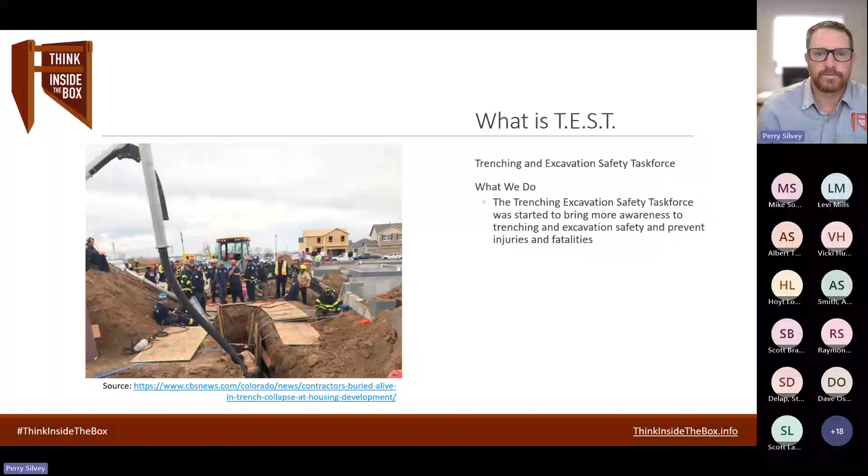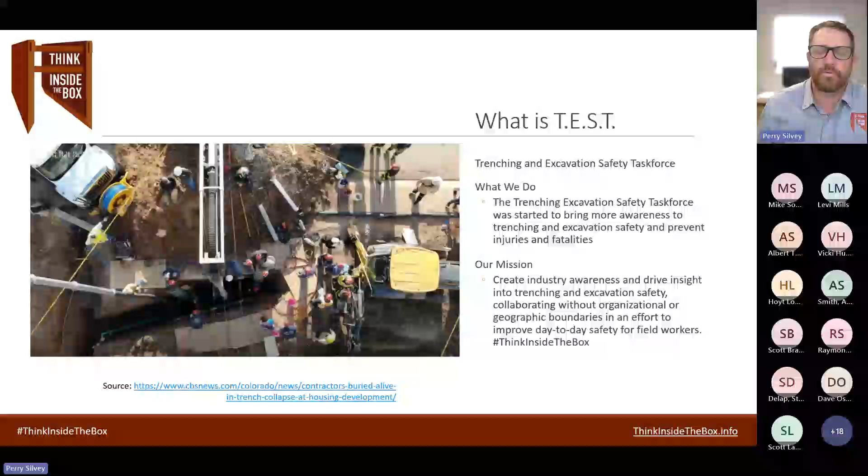And we have a mission. We came up with this shortly after we started our task force in 2019: to create industry awareness and drive insight into trenching and excavation safety. We want to collaborate without organizational or geographic boundaries in an effort to improve day-to-day safety for field workers. Since the beginning of our task force, we have the hashtag Think Inside the Box, which is our concept that we'll get into and explain.

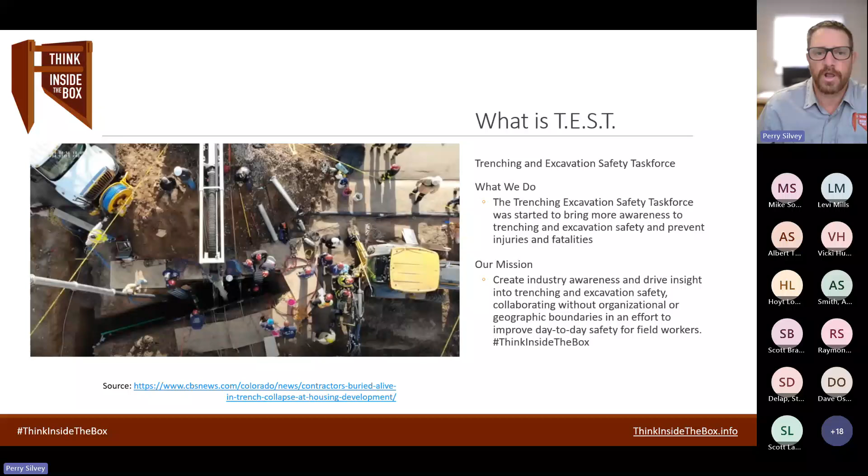You'll notice a picture on the screen there, and that's a picture of a trench collapse that occurred in 2019. This was actually taken by the firefighters' drone to show what this site looked like from above while they were trying to rescue people buried in this trench.

So why was it started? It was exactly from that event that occurred in Windsor, Colorado, Tuesday, April 16th, 2019. There was a trench collapse where two individuals, 26-year-old Cristopher Ramirez out of Boulder, Colorado, and 41-year-old Jorge Valadez out of Denver, were both buried in a 15-foot deep trench. The story that really got us passionate about this subject is that these two workers were buried in the 15-foot deep trench, and there was a trench box on site that they chose not to use.

Then the firefighters got on scene. They were able to quickly get a PVC pipe down to one of them, and he was able to communicate with the firefighters for a couple hours after the collapse occurred. The firefighters got in touch with that individual's significant other and he was able to speak with her before he passed away.

Unfortunately, they weren't able to communicate with the other victim. He had passed away fairly quickly after the collapse. But the part of this story that really hits us deep is the fact that they were able to communicate with him, and he was able to communicate with his wife before he passed away. Shortly after this event, about a month or two later, she had their baby, and that baby had to live life without his father. So that story really hit deep for us, and we wanted to try to do something.

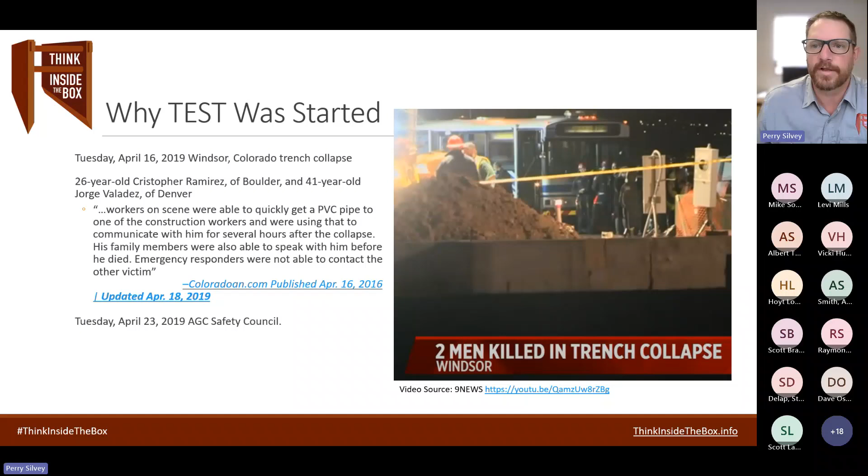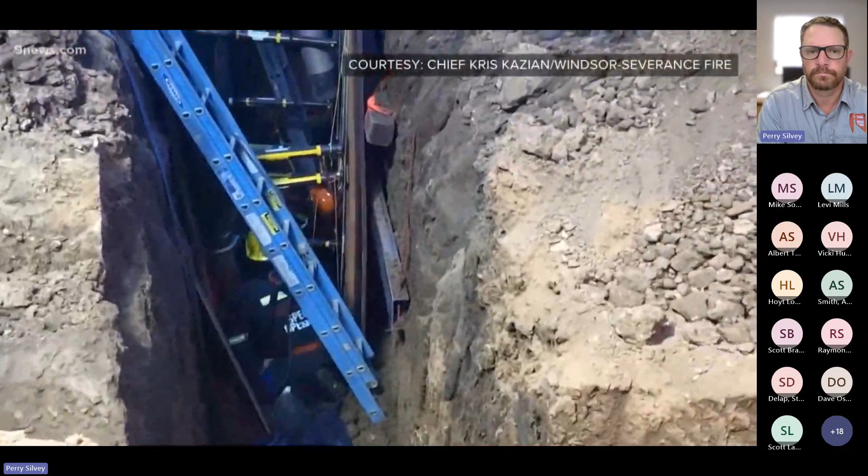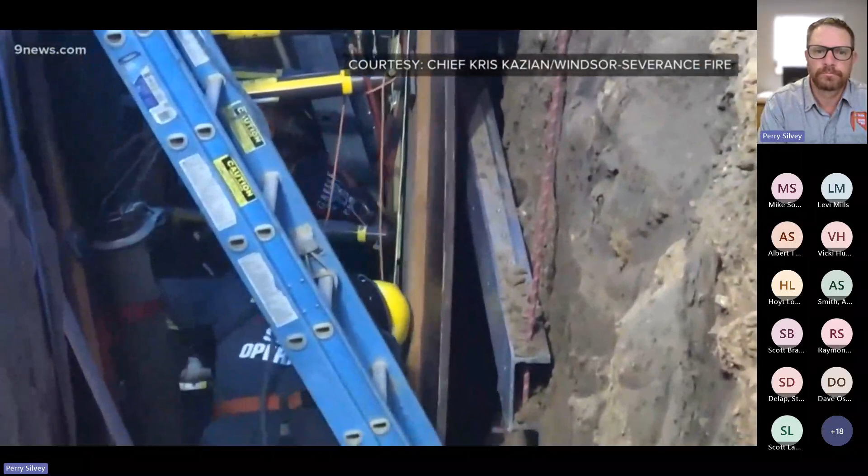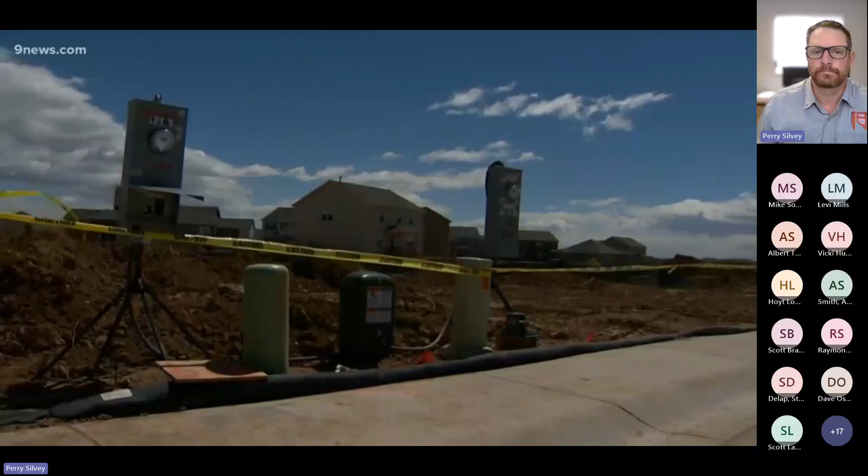This was a once-in-a-career type incident. The call that cleared the garage on Tuesday. It was empty. Sent everyone, including Chief Kris Kazian, to a home construction site on Camberley Drive. It was a long day. All that dirt is all dirt that caved in. Two workers in a trench were buried in about 8 tons of dirt, very heavy, very compacted when it all collapsed. Fire crews don't think anything was used to shore up the trench walls. On arrival, we did not see a trench box in place. They used heavy equipment and eventually shovels to dig. Every time we got a bucket or two of dirt out, more dirt would fall in on them. They knew at least one worker was still alive. For whatever reason, in this case, he was able to breathe for hours, able to talk too, first through a PVC pipe and then through a microphone to family gathered at the scene. Our crews felt it was important for this family and for him to have an opportunity to speak, a chance to say goodbye. As responders, we were concerned that we might have a poor outcome, but we wanted to make sure that he and they got a chance to communicate. It would be nearly 12 hours before crews pulled the men's bodies from the dirt. It's very challenging for all the responders, mentally and physically. The kind of call no chief wants to repeat. Our thoughts are with the families. It's definitely a tough time, and didn't have the outcome that we were looking for, and we worked very hard to have a different outcome. In Windsor, Noel Brennan, 9 News. Last year, OSHA announced it was making it a priority to reduce trenching and excavation accidents. This comes after 23 workers were killed nationally in 2016, another 32 in 2017 and 2018.

So a pretty heartbreaking story there, and again, that's really what motivates us, is stories like that. That one really kicked us off and got us started, because this is unacceptable. There are safety measures we can do: sloping, shielding, shoring. There are methods that work, and that's what we started talking about initially when we got together as this group. What can we do? What kind of message can we get out to the public and to these workers entering these trenches, and how can we help them make sure they're going to make the right decision.

And that's been the challenge since day one. Since they had a trench box on site and chose not to use it, it comes down to that choice, it comes down to those guys making the right choices. And why did they choose to make the wrong choice? I think there's definitely a lot that plays into that too. Was the trench not the right size?

Who knows what the main reasons were, but they chose not to do it right. And that's the part that really has frustrated us, and it's something we're trying to figure out how to change that behavior. So right out of the gate, we started this message, this think inside the box message.

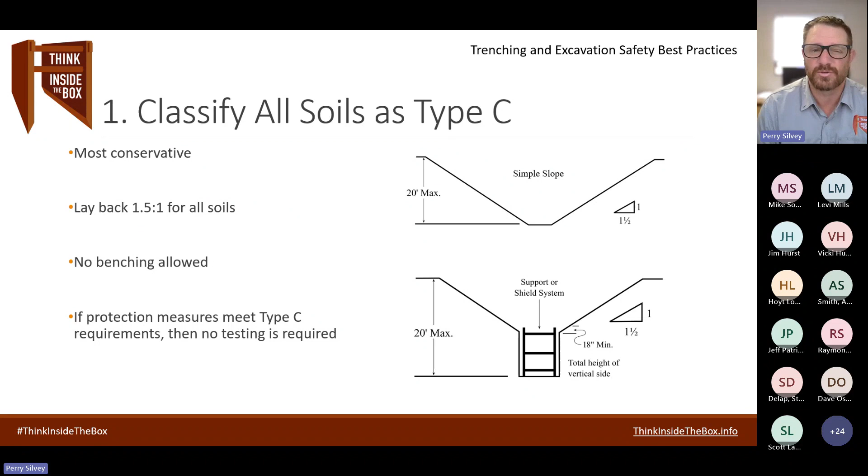The one thing we want to emphasize here is if you excavate your soils and assume everything is a type C soil, then testing technically is not required. So you can basically put that on your daily trenching and excavation permit or your job hazard analysis, or whatever form you're using on a daily basis. Your competent person can add that in there saying we are classifying this as a C soil, which is the most conservative method, and then you'll be protected from that.

Now, the other thing to remember is if you're using trench boxes or shoring systems, you also have to make sure you follow the type C requirements for that tab data. There's going to be some additional requirements - you'll see that the soil depth that thing's rated for is going to be a lot less in a type C soil. So if your program says you're classifying it all as type C, you do have to follow all the rules, including the tabulated data that comes with those shield systems.

So even if the shield system says it can go deeper in a B or an A soil, if your program says that you're classifying everything as a C, then you really can't follow the tab data on those sections. You have to actually be more conservative and maybe get a different box if you're going to go deeper. Make sure that it really reads as that requirement there in type C.

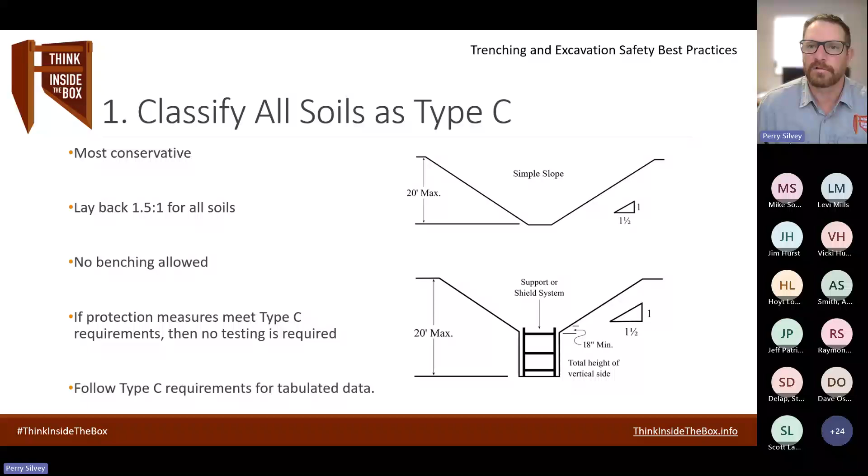All right, number 2 on our list is to use a protective system even if your excavation is less than 5 feet deep. That's kind of hard for some people to wrap their brains around, because a lot of us look at that 5-foot zone as really our depth that we can go vertically and not have to worry about any sort of protective measure.

That soil is very heavy still, so it wouldn't be a bad idea to at least lay it back or provide some sort of protective measure for those excavations. Even if it's less than 5 feet deep, it can still collapse and hurt somebody.

The other example we like to tell is a lot of times it could be irrigation lines, or something where you're kneeling down to put this pipe together. And when it's around that 4 or 5 foot area and you're kneeling down, a lot of your body is down underneath that excavation. We saw an injury years ago where a guy was kneeling down and a chunk of dirt came off and landed on his leg and twisted his knee and caused a very significant injury. He was able to survive that, thankfully, but you can see how dangerous it can still be.

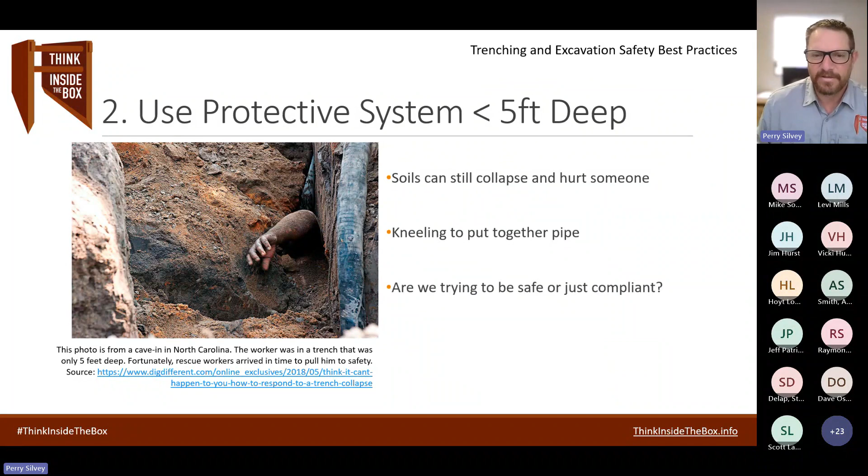So the other concept here is, are we trying to be safe, or are we just trying to be compliant with OSHA? Because really, OSHA law is our minimum requirement, and that's something we want to try to remember, that we want to be putting our employees in the safest positions possible and prevent anybody from getting hurt, and especially prevent anybody from getting killed. So looking at these opportunities to maybe go a little bit above and beyond the standard could be something that you might want to do as an organization.

So it's worth a conversation with your top leaders and just see, is this something we want to talk about? Maybe you go at 4 feet deep, you say everything 4 feet or deeper, we're going to do something. I've heard of companies doing that, and that's an option. Again, not required, but you do have to follow that. If you do change your policy and it's more strict than OSHA, you do have to follow it, because if OSHA comes out and visits your site and looks at your program and you're at 4 feet and don't have some sort of protective measure, you can actually be cited for your own program not being followed, which is more strict than OSHA.

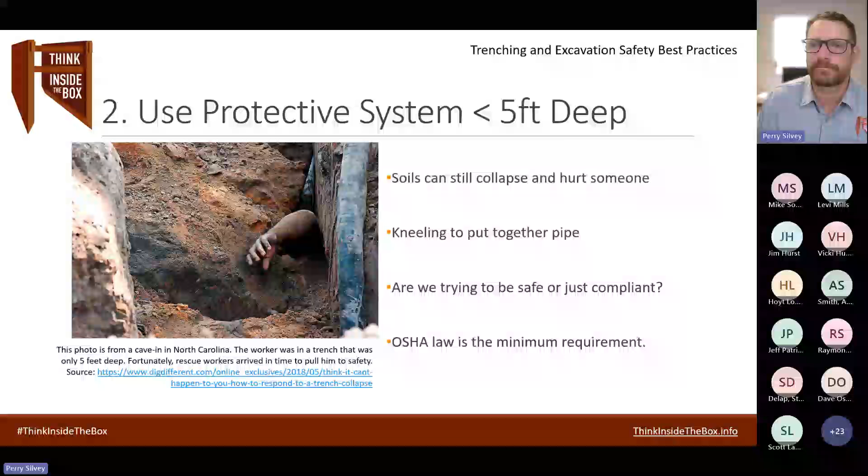So ladders are definitely the most common in excavations. You can see up to a 90-degree vertical level, we can have a ladder, and then going down to about 60 degrees is really the maximum we really want to have on our ladders. However, we see these ladders sometimes laying on slopes, and these slopes are going to be, if you really are doing your excavations properly and having a 1.5 to 1 slope, they're going to be at a 34-degree angle, which is a 1.5 to 1 slope.

So you can see where the ladder laying on that slope is probably not your best bet. It's probably not your best option, because you'd really want to have either some stairs or maybe start looking at ramps as an option.

So it's something to think about as far as a best practice: start looking at some sort of ramp, because you can carry tools and materials, and get up and down that slope a lot easier than with a ladder. There's a lot of companies nowadays going with this ladder-last concept, trying to find ways to get in and out of work areas without a ladder, because ladders are so dangerous. One wrong move and you're falling off that device and onto the ground.

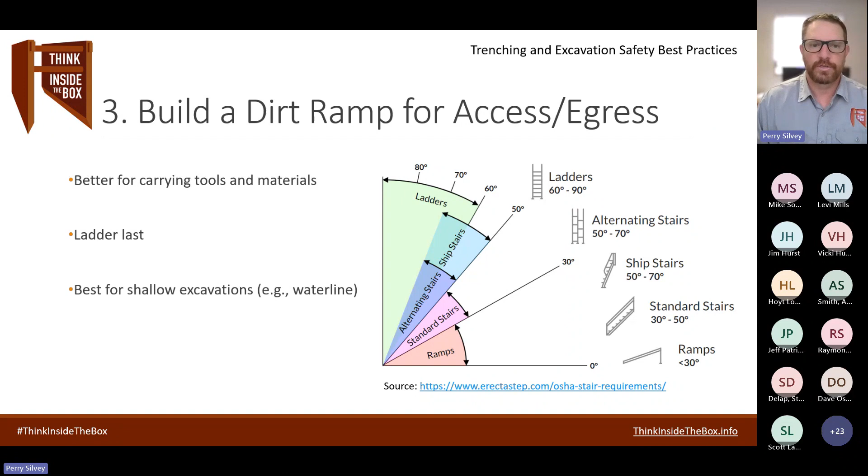This whole ramp idea is really best for shallow excavations, something like a waterline excavation, because once you get deeper it becomes a little more challenging to create ramps. So really 4, 5, 6 feet deep, you can start to ramp yourself in and out, kind of using even a goat trail type of system to get in and out safely.

We try to encourage our guys to use the bucket at the same angle as their trench, and make it just a little bit wider so they're able to use that as a ramp. So that's an option, again a best practice. Try to figure out these opportunities to make your job site safer, and ladders are definitely one of those we want to look at.

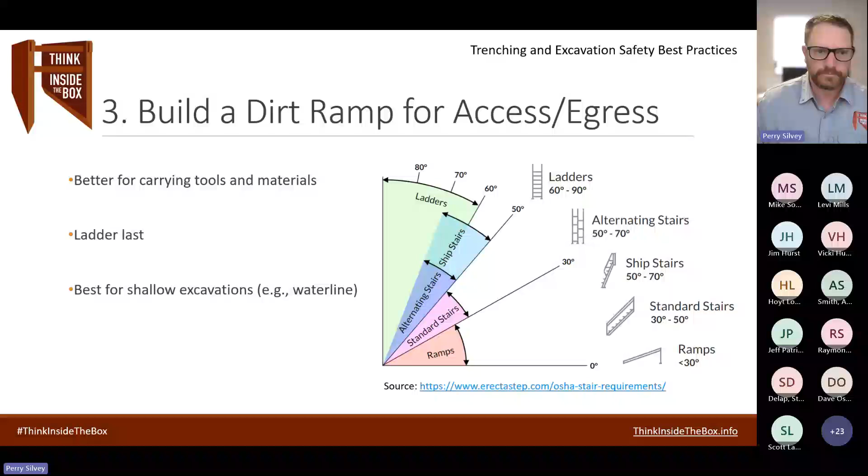And here's a bonus tip for you. Looking at these stairs, there's different vendors out there that might have stairs similar to this that you might be able to utilize. So look on the internet—there's a lot of options out there, companies willing to help you out, especially for those long-term excavations.

If you're going to be going in and out of this excavation for weeks on end, it would make sense to start looking at ways to make your excavation a little bit safer, and secure something there that they can walk up and down instead of climbing. So again, just an option, something to look at as an opportunity to make your job site a little bit safer. All right, moving into number 4 is a ladder platform.

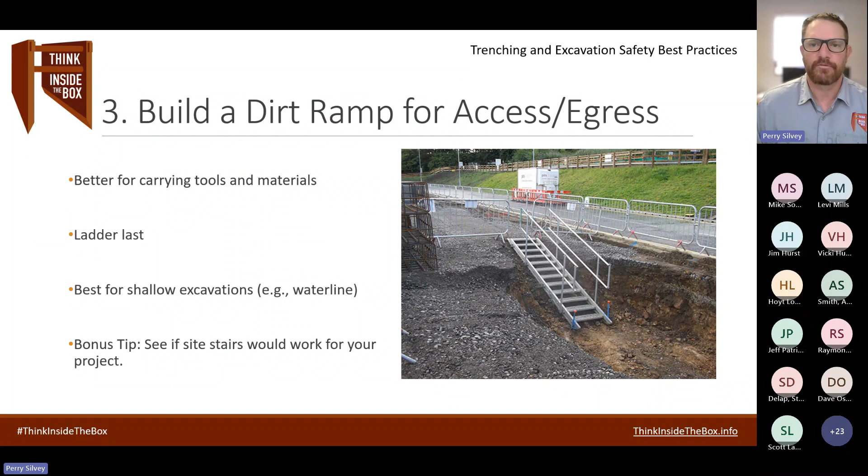So this is one of those where some companies just use a ladder, place it right in their box, and call it good. Well, some companies are looking at this as an opportunity to ask, how can we make this egress, this access point, a little bit safer?

And then the other important thing about these platforms that attach to the box is you can actually have one of those catwalks, or some guys call it a walkway, to bridge over some of those large voids outside the box, so you're able to bridge over that and then enter and exit safely in and out of that box. There's companies around town that have those. We've utilized a couple to purchase units for ourselves, and it's been fantastic. They make them in different lengths—10 foot, 12 foot, 20 foot—so you can have good, safe access and egress in and out of your box.

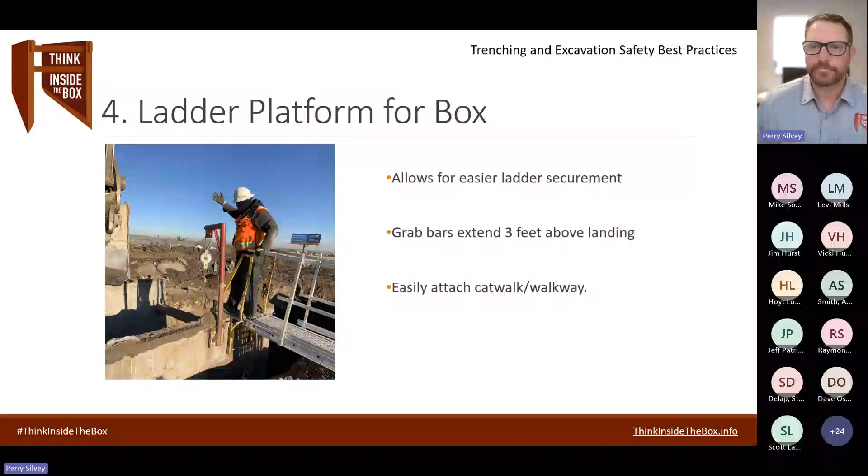Highly recommended. All right, the next one, number 5 on our list, is to mass excavate before digging a trench. This is a great option if you've got a really deep trench and you need to try to reach that, because our excavators can only reach so far.

So you might need to do a little bit of mass excavation to be able to reach that. You've got to ensure that the top of slope is far enough back. As safety professionals, we need to be doing a little bit of math and really make sure that we don't have too much dirt near our excavation.

You can see in the picture there, they've got a very large bench that was generated where their catwalk goes to the trench box, but then they've got a ladder laying on the slope going up to the top. That's a pretty wide base. We're not just moving a little bit of dirt, we're moving a massive amount so that the extra dirt weight isn't causing an issue with the bottom trench boxes in place there.

The other important thing is that the trench boxes need to be rated for the full depth of the excavation - that's the entire mass excavation plus that trench depth. Something to consider: if you move a lot more dirt off the surface and get it well far away at the 1.5 to 1 slope, or if you have an engineer look at it and help you, you might be able to make some adjustments in the engineering. But make sure, at least in the initial planning of the project, that you have trench boxes ready for that full depth.

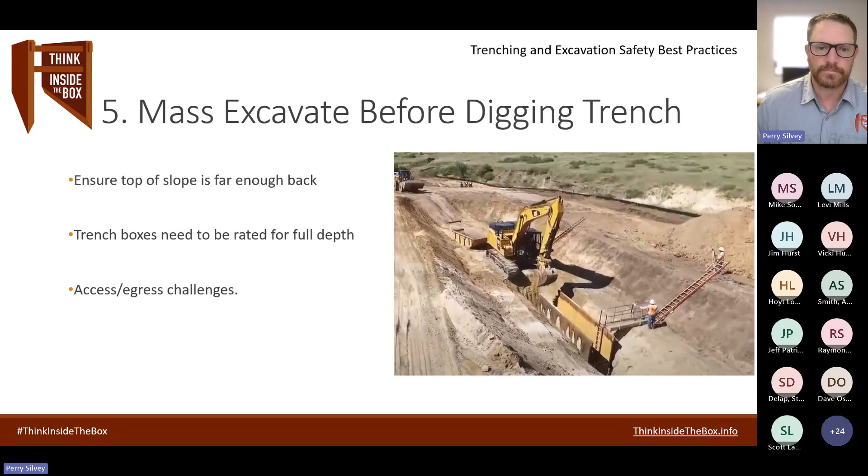Number 6 on our list is let's utilize some trenchless methods if possible, right? A little shameless plug here - that's part of what we do at Be Trenchless. We're able to do this kind of work because we want to try to bore under those dangerous utilities and not have to open cut through those and try to support them somehow. We're able to utilize these methods that can go underneath them and get through those areas safely, preventing having to even deal with some of those dangerous utilities.

And also those unsuitable soils. We're getting ready to start a project that has a ton of groundwater and a lot of soils that would be really, really difficult to dig through from a trench from the surface. So why not just dig a bore pit and then push through that without having to dig open cut and cover style.

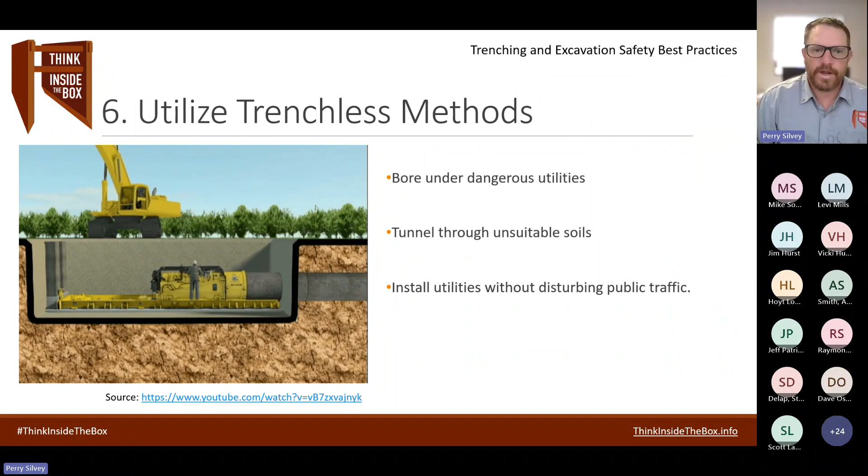And then we can also install utilities without disturbing the public traffic. A lot of times you've got those situations where you're trying to dig through a road or a street, or through a highway - not very easy to deal with, of course. So why not just bore across that and not have to deal with the public?

All right, fencing - another important best practice to think about, just from an insurance perspective. There's a lot of reasons why you want to have really good protection of your job site, mainly at the end of the job, but even while the work is going on, you might want to have some way to keep the public out of your work area. So you want to secure that site and make sure nobody gets in, especially before leaving for the day.

A really good best practice is to use chain link fencing if you can, as opposed to the orange fencing. Orange works great, it can be at least a deterrent, but the chain link is just much more secure and can be a much better option for your project.

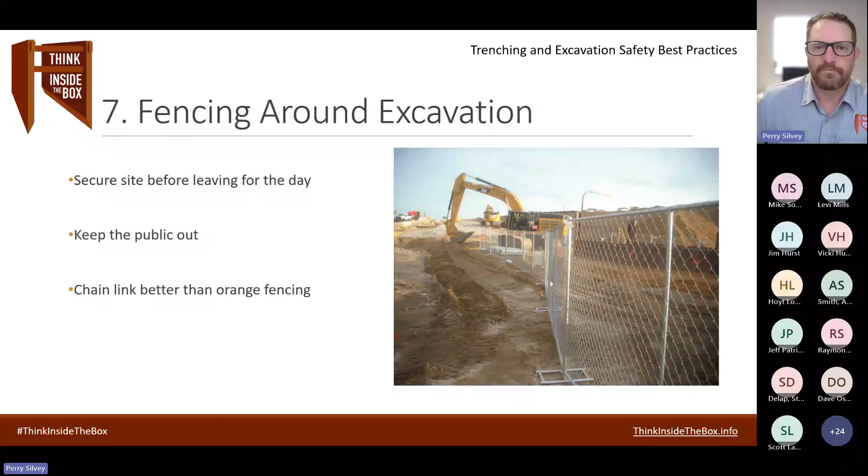Another option here is to place weights on the feet where practical, because those feet can be tripping hazards for the public. So maybe in areas where you've got a lot of foot traffic, a lot of people walking that are maybe from the public, maybe near a mall, you want to make sure they're not going to get hurt either. Look out for the public, look out for those other people that might be near your project. Again, for insurance purposes, why not? It's not that expensive, and it can actually benefit you, helping prevent any of those from falling over.

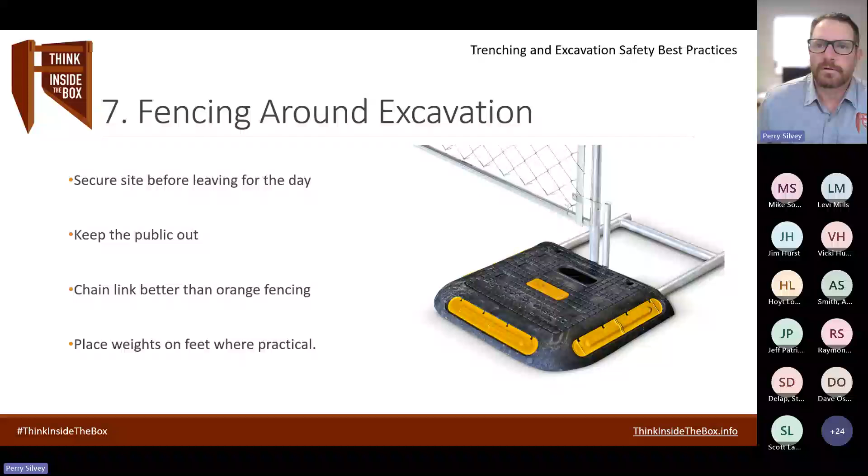All right, let's transition to number 8 here, inspecting and repairing our trench boxes. The important thing to remember is that repairs need to be performed by a certified welder. That's important because those welds need to basically rebuild them back to the original design and condition of those boxes.

You've got to have that professional engineer approve those repairs or recertify the tab data, especially if you've made any adjustments. Maybe you've moved a pocket, and it's not exactly how the original design was. You're going to have to pay an engineer to redo the tabulated data. If you put it all back to the original condition from the original tabulated data, then you can just use that certified welder and put it back to that original condition, and you should be good to go. But yeah, some things to remember there.

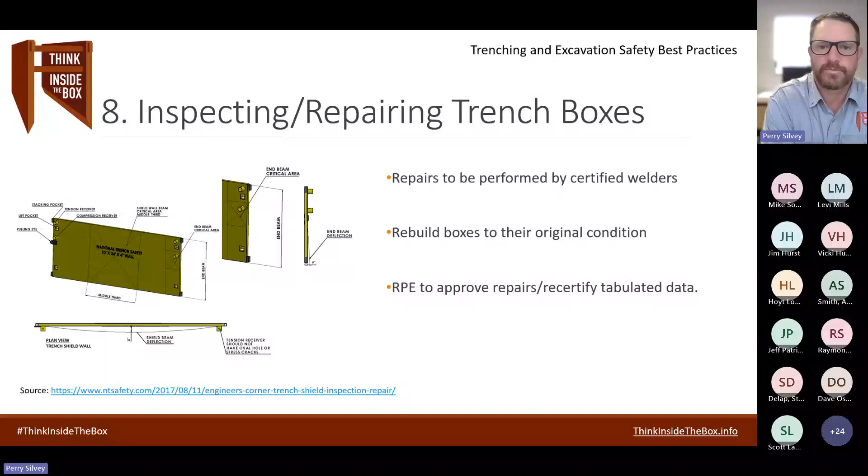And then also looking at the deflections. If there's any major deflections, those really need to be taken out of service. Best practice here is 1 inch over 10 feet. Every manufacturer has a little bit different requirements for their boxes, but if you have any deflection more than 1 inch over 10 feet, you may need to have that looked at and repaired, because that could be dangerous. I would say most of our boxes look like that, so we need to do what we can to get those back to original condition.

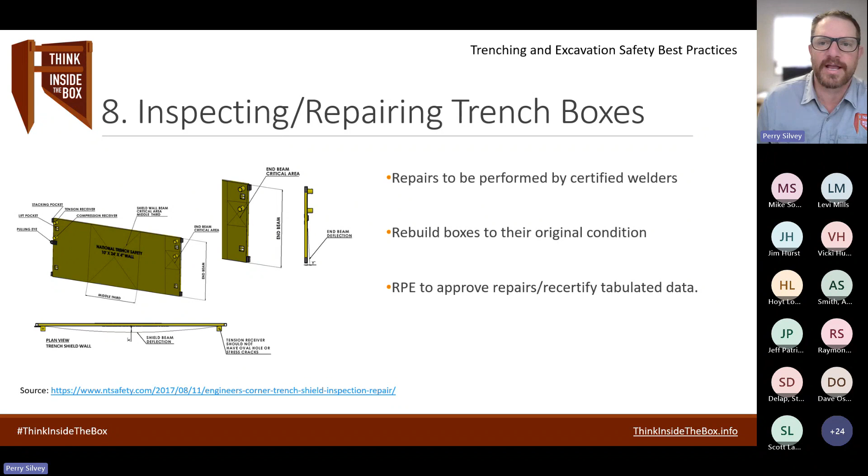All right, number 9, fall protection. A lot of us in the subpart P realm, in the excavation realm, know that fall protection is excluded from the standard, and we don't typically need to worry about it. However, if you have any long-term excavations, things like pits installed for a period of time, it makes sense to start putting some fall protection up. And even on an open cut excavation, if you think it's dangerous and don't want somebody falling in, why not put up something to protect your employees? Falling is the leading cause of death in construction, so we ought to be doing something to help protect our employees.

This is a best practice, again not required in a lot of instances, but something to think about. So what we do on our pits is we actually leave our outside grade down by 42 inches to allow the box itself to act as our guardrail, which works really well. Definitely something we'd encourage if you need to do something similar to what's shown in the picture. Remember to have that access egress up into the box.

There's a 19-inch rule, which is in a totally different standard - I believe it's in the walking working surfaces standard. You don't want to have more than a 19-inch step up. So what we did here is we put a ladder made out of 2x4s to basically get up to that ladder platform, like the one you saw in an earlier picture. You can see the ladders hanging on that platform and attached there. You want to make sure getting in and out of your box is safe, not only getting down into your trench, but also getting out of it. So just something to think about when you're planning your excavation.

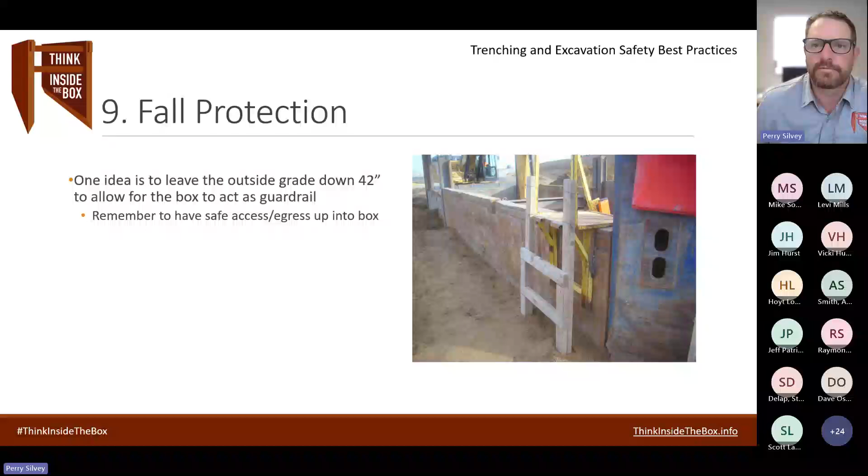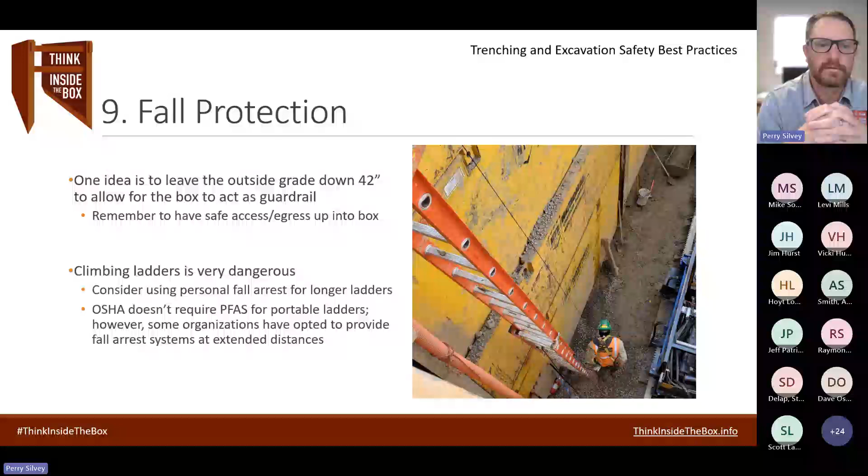Climbing ladders can be something that can be very dangerous. We talked about ladders a little bit, and how some companies think ladder last, but really it's not practical in a lot of situations to not use a ladder - you have to use one. So some companies use a personal fall arrest system for those longer ladders. Something to think about. You can see the self-retracting lanyard attached to that individual's harness there as he's going to be climbing up and out of that dangerous situation.

You can see the davit arm that we've installed up on the surface - we call it a swing arm - but this one's welded onto the box, and it's got the SRL attached to that, and it hangs right over top of the ladder, so that as they're climbing, it will swing over them and center that SRL over their body. So if they do fall, that self-retracting lanyard will stop them immediately and keep them from falling all the way to the bottom. Side note, a little joke I like to tell our guys: the fall doesn't kill you, it's the sudden stop at the end. So we want to prevent that sudden stop.

We want to stop them suddenly up above somehow before they get all the way to the bottom.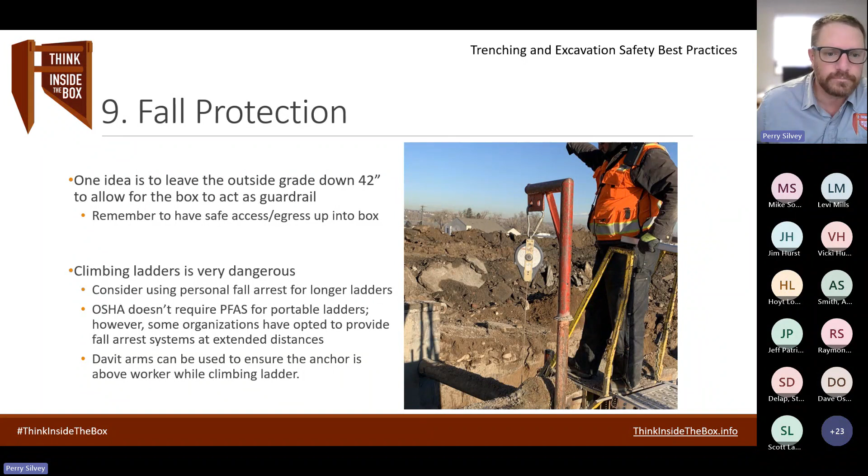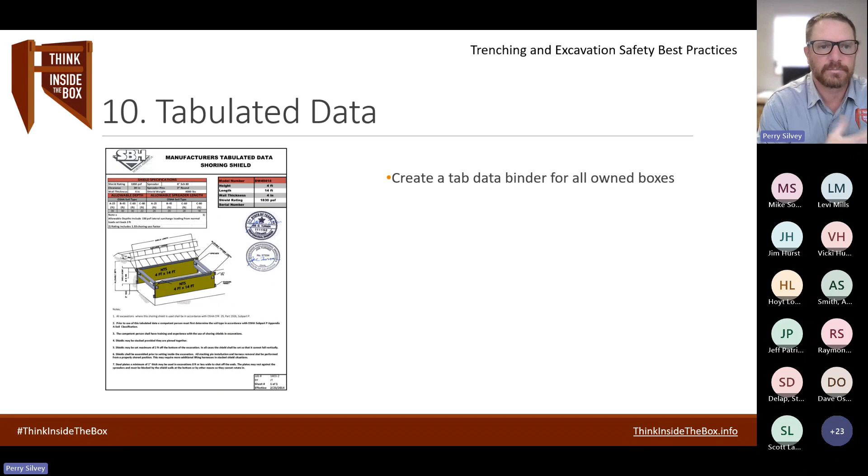All right, tabulated data. Let's dive into this, maybe some best practices you hadn't thought of. What we've done is create a tab data binder for all of our tabulated data, everything we own, so it's easy to find. We've also put that into our new electronic system, so it's readily available on site.

It's always important to ask for this information from the rental company. If you're using a rental trench box or trench system, make sure to ask for that tabulated data and keep it with the box while it's on site, then follow the requirements. It's so important to make sure we're following what the maximum depth is, because if an incident occurs and you're deeper than what the tabulated data says, that's a big no-no.

Make sure we're following the rules on what the tabulated data actually says, as well as the spreader length. If those spreaders are too long and the box gets destroyed because of that, and an incident occurs, they're going to start doing math and figure out we installed it incorrectly, which could be something you're liable for. And then the soil type—we talked about type C soil—make sure to follow the requirements on the tabulated data for soil type. All of that is very important.

So have those discussions in your pre-planning meetings before starting the project, and make sure you're setting your guys up for success, so when they get out there, they're able to install those safely and take care of the people.

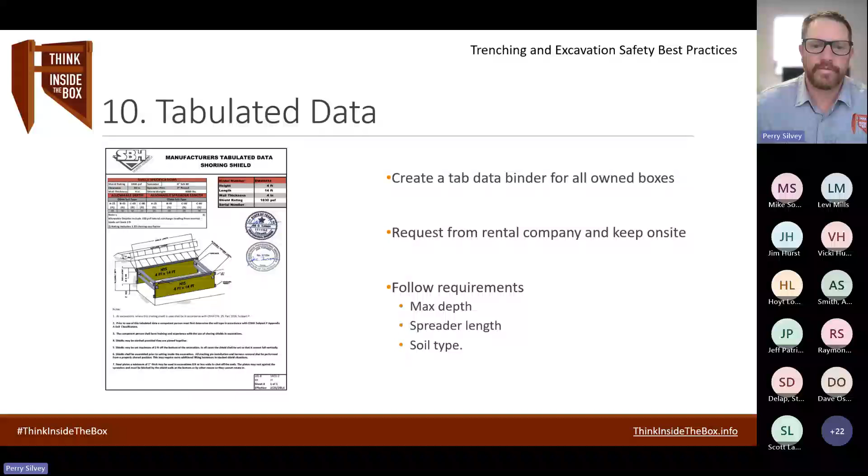At this point, Mike, I'll leave it up to any questions we have. Scott, anything else you guys wanted to address here? That's all that I had.